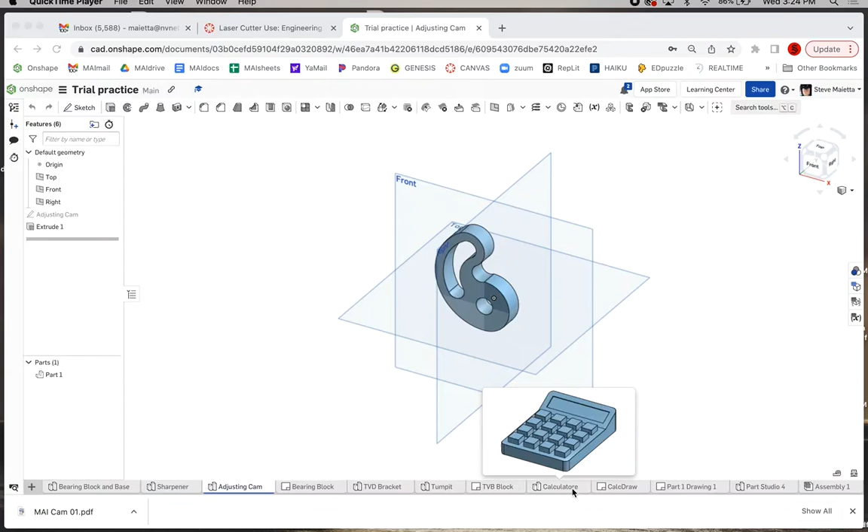OnShape to laser, first part. Let's get our file out of OnShape into Illustrator and set up to move to the machine.

So we've got our part, a simple part here. Now you can export in two different ways. You can export the sketch, which for a simple part like this is probably the way to go.

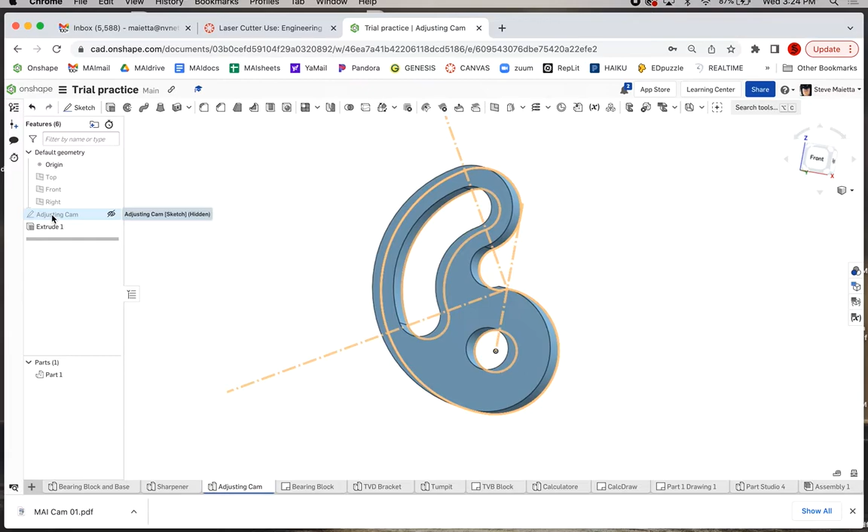So if you have a single sketch that makes a part, like this cam made with one sketch, you can right click or two finger click the sketch and export as DXF.

MAI Cam 01 - I always use 01 because you're going to have different versions as you're exporting and making changes, so numbering them keeps it organized.

DXF, and these options are fine. Hit export, and you will see, in my case, MaiCam01 DXF coming down in Chrome.

I'll take this now and drop it onto my desktop. You may have it set up where it puts it into downloads. Either way, that file is ready to go into Illustrator.

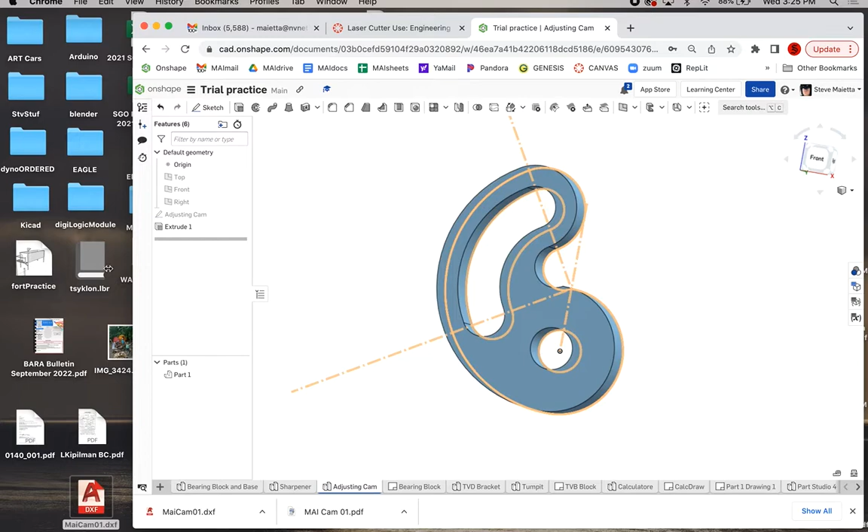Now if you have multiple pieces that you want to put in a file, that's fine as well. What you're going to do is create a drawing. Create drawing. ANSI A is fine, click OK.

And we're going to import the parts that you want to put in your drawing. So we're going to select, for me, the adjusting cam here.

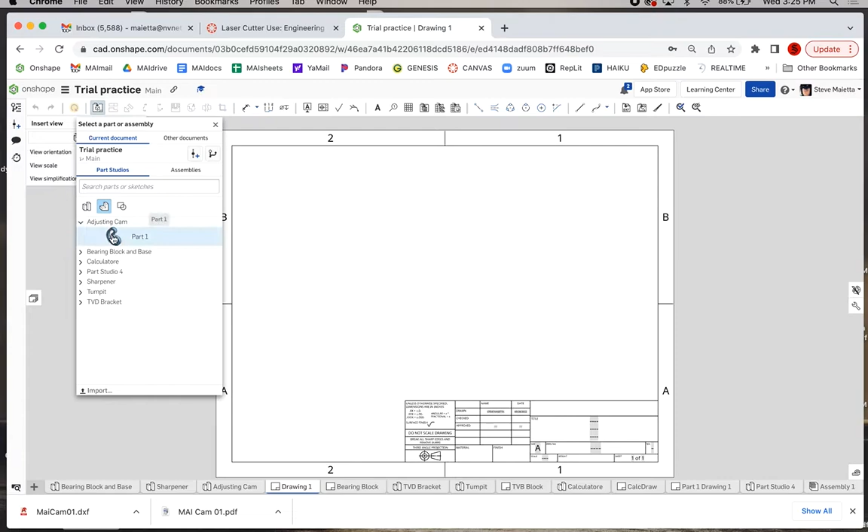Now you want to make sure the view scale is 1:1. You want to make sure this prints out at full scale. So here it's 1:2, I'm going to put it up to 1:1. And there's my cam.

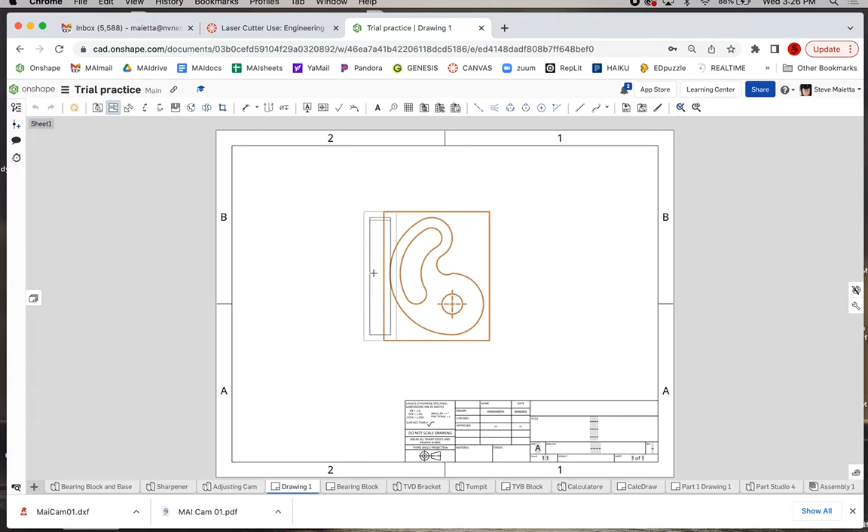Now we don't want any other views of the part. We just want the flat shape that we're going to cut out. Next thing you need to do in your drawing, you don't want all this extra stuff around, so I'm going to box it and delete it.

So I'm going to gather a box around here, press delete, and clean off my page here, getting rid of all this stuff.

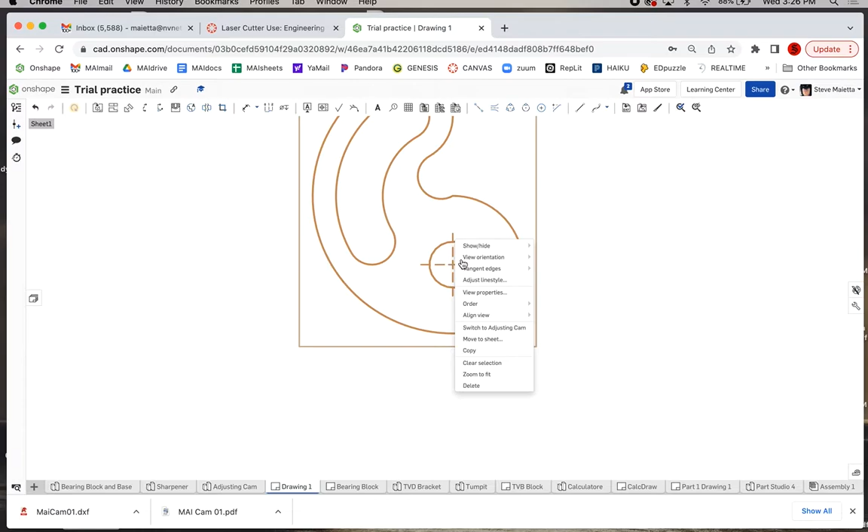Or else Illustrator will cut that. And we don't want these crosshairs here either, so two finger click, show hide center marks. Okay, so all you want are the lines that you want the laser to follow to cut your material, and position it to the top left.

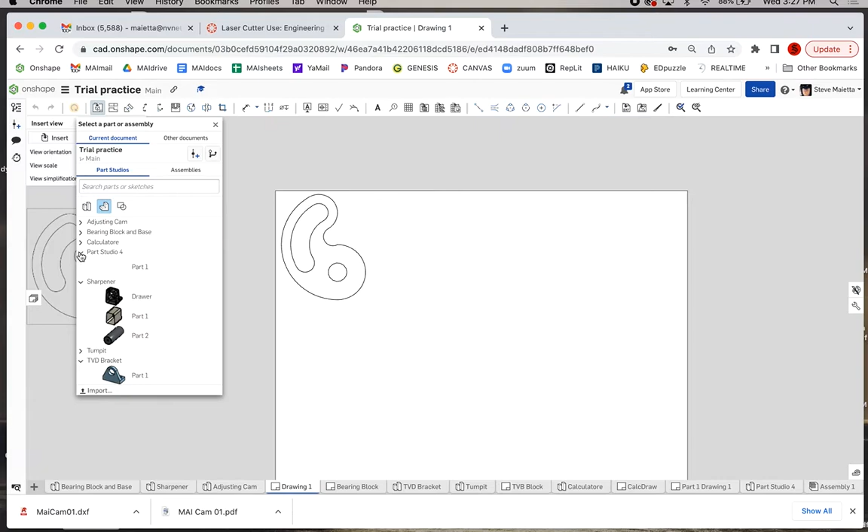All right, so there's our drawing. Now you can put multiple parts in a drawing. So if I insert another part, for example a bracket - I don't know exactly what my file has here.

So let's say this block, a bearing block, we can put in another part. Let's drop this one over here. So there's the bearing block.

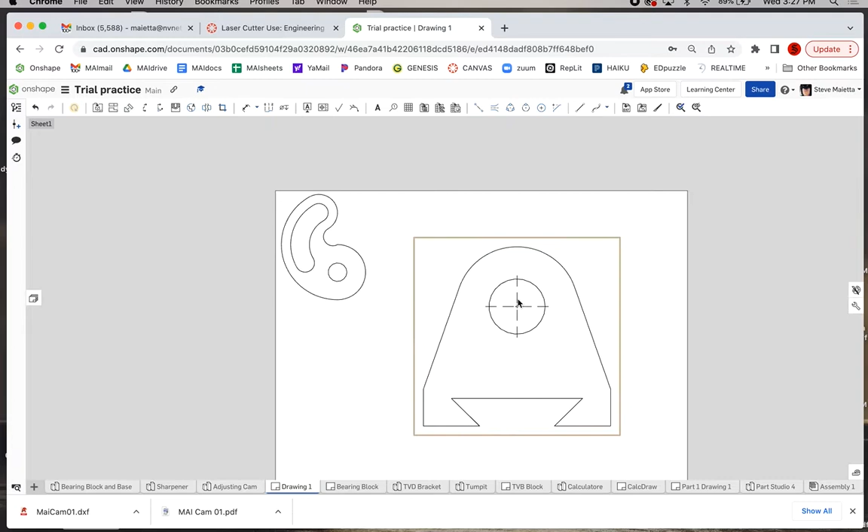All right, so we don't want any other views. Escape. Two finger click. We're going to hide these center marks - show hide center marks.

And position this over here. Don't position them too close, or it gets hard to select one and move it away in Illustrator. Give yourself some space. All right, so there's your drawing.

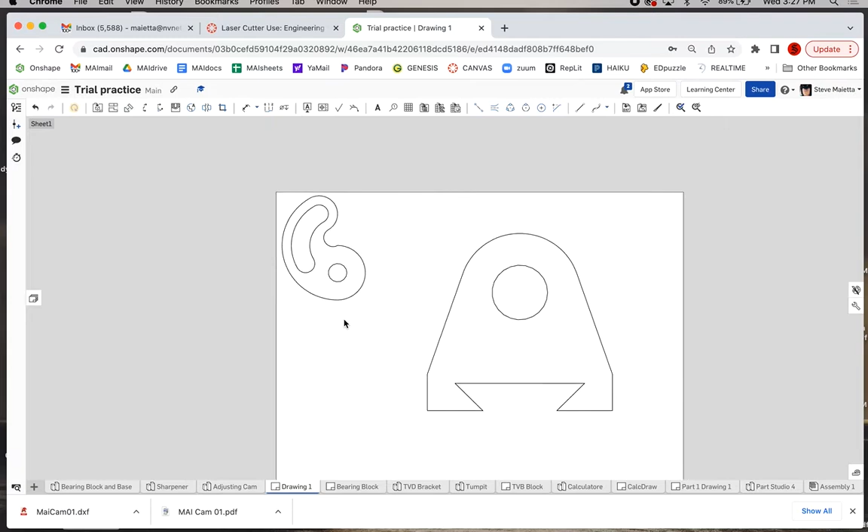When your drawing is ready, two finger click the tab and we're going to export. We're going to right click, export MaiParts01, and you're going to do it as a DXF once again.

All right, export, and it will put it on our Chrome tab. There it is. I'm going to drag it to my desktop over here, and there you go.

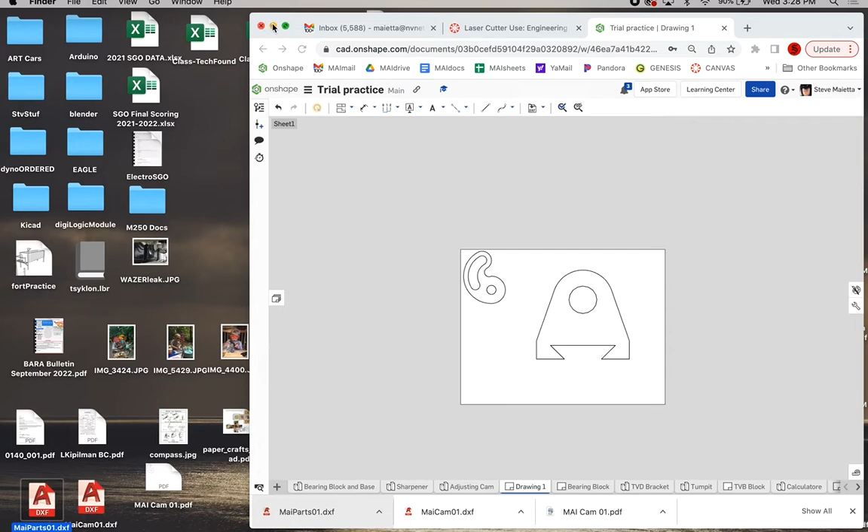All right, now we can get into Illustrator. So here's Illustrator. First thing you need to do is tell Illustrator to use units of inches.

So go to Illustrator, Preferences, Units. General inches, stroke inches, type inches, okay? If you don't do this, it's going to think every inch is a point and your parts are going to be tiny or something like that. So that's fine, click OK.

Now what we're going to do is I like to just take my file and drop it into Illustrator by just dropping it right there.

Okay, now this is important that you keep it at original size, right? You're trying to make parts exactly as you made them. If you scale it in any way, you're going to change the size.

And also check that it says scale of 1 to 1 inches. That's what we want. Click OK.

Now we're in Illustrator, okay. So Illustrator works a little differently than OnShape, but I will do my best to show you the tools you need to use here.

So this arrow, the top arrow, the V selection tool, is the one that allows you to just kind of drag things around. So let's try to line these up here.